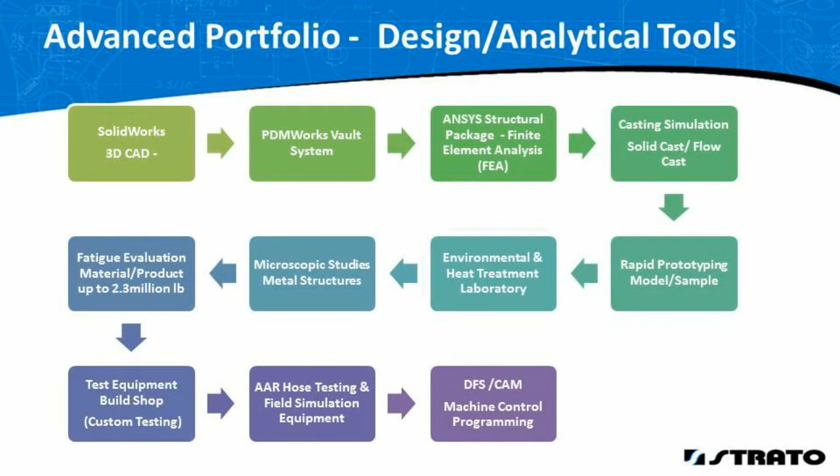Strato's depth of engineering is highlighted by what surrounds the team in terms of tools, equipment, and facility. Our 10,000 square foot research lab houses a complete product development lab, including state-of-the-art equipment to test products and materials. Strato uses an extensive portfolio of tools, processes, and laboratory testing to develop and improve parts. With these, we can optimize strength and fatigue life while minimizing cost and weight.

SolidWorks is our base platform for drawing. It has features to allow modeling, assembly layouts, animation, and to provide imports to more advanced tools. This also has one of the highest compatibilities with other CAD systems. We can and do exchange drawings with our vendor and customer software. For easy customer interaction, any file type can be created to exchange drawings or models within any other engineering software.

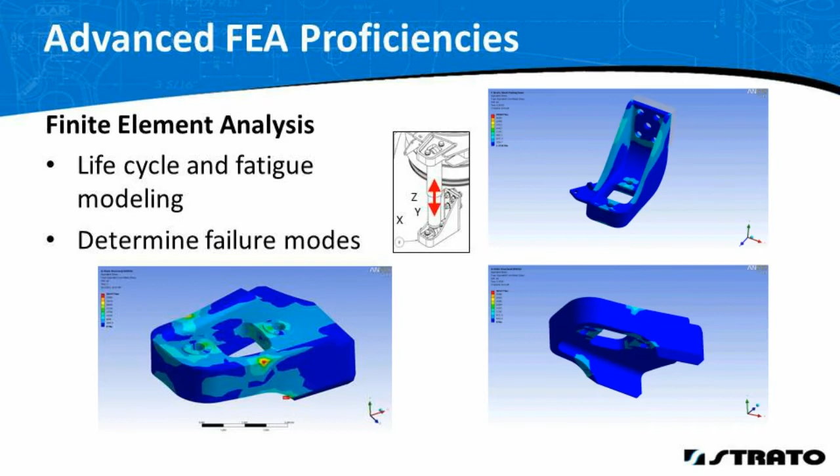One tool that uses inputs from SolidWorks is the ANSYS Structural Finite Element Analysis package. Strato Engineering has advanced capabilities to perform product strength evaluations, fatigue analyses, and determine failure modes of current design, and then optimize a new design.

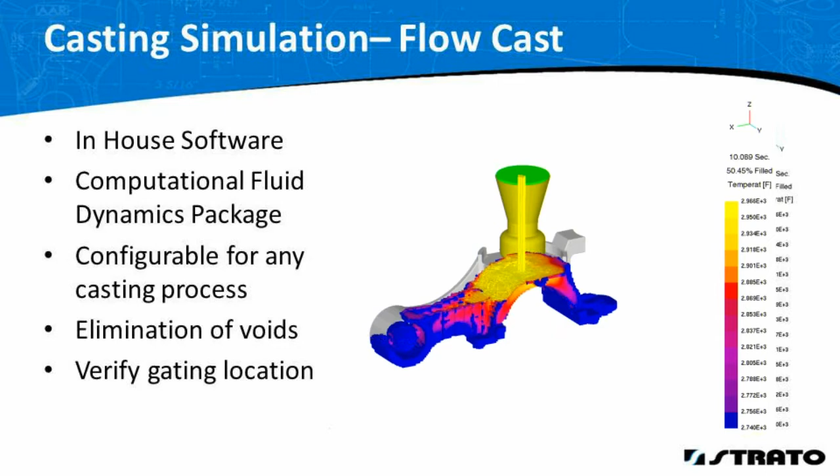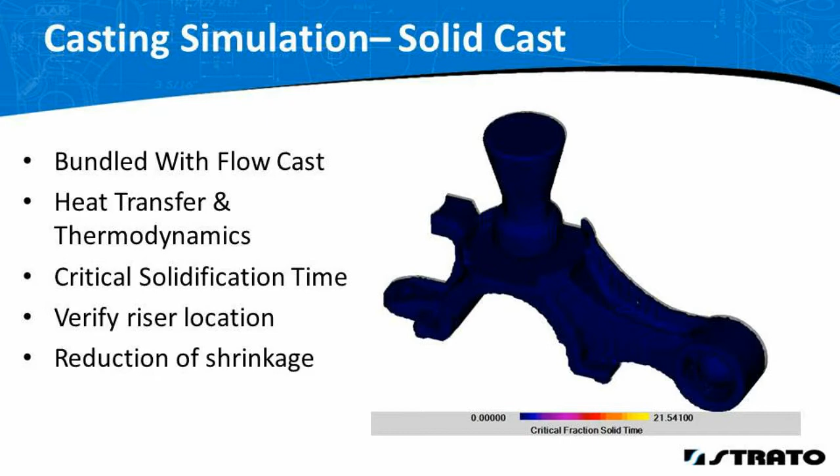Strato also designs the tooling critical to casting successfully. We use FlowCast, a computational fluid dynamics package, to optimize part orientation and gating locations to ensure the elimination of voids. We also use SolidCast, a heat transfer and thermodynamics package that works in concert with FlowCast. This package provides Strato engineers the critical fraction solid time to mathematically verify riser location and eliminate shrinkage. These products are used with our vendors' toolmakers to maximize casting integrity.

Modeling is a key resource in design. Our rapid prototyping machine can build a plastic model in under 24 hours, which can be taken into the field to be tested for form and fit. When designing parts to fit across a wide range of cars, this testing can be very valuable.

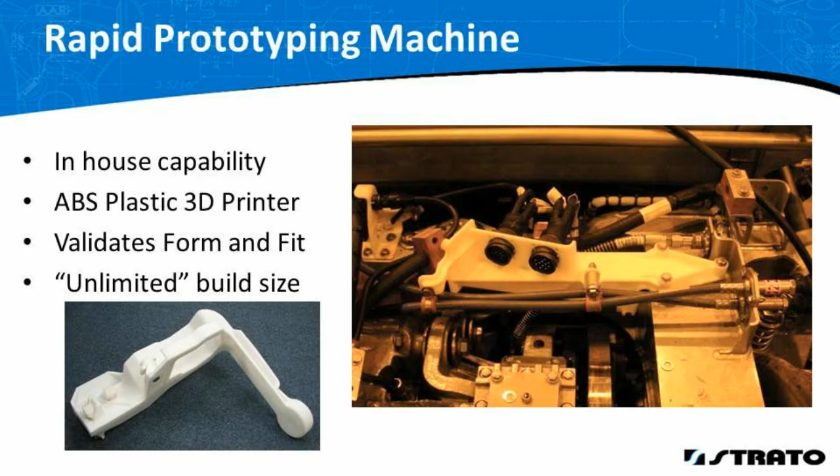On the left is a 3D model. A plastic prototype can be made in 24 hours for fit up from the 3D model. If desired, Strato Engineering can take the plastic prototype and have it cast in steel using an investment casting process. This allows us to make a steel sample for testing without the expense and time of permanent tooling. A sample can be available in less than 28 days.

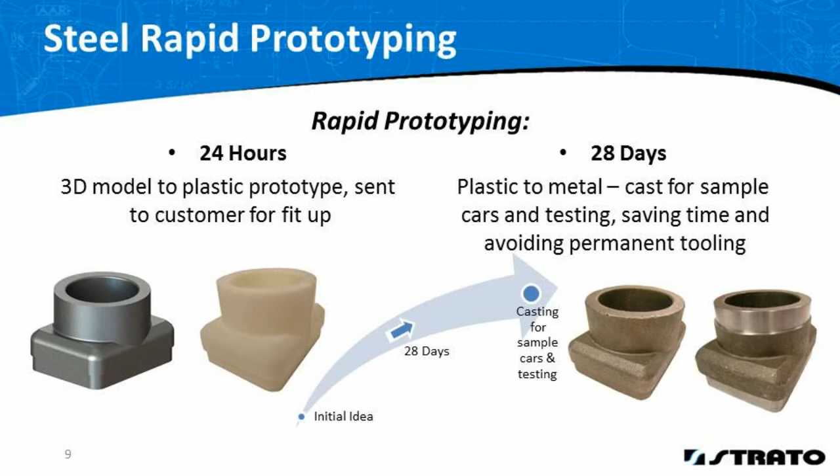Designing a product and simulating the stress loads is only the start. Metallurgy and material properties are critical for product performance. Strato has an in-house metallurgy lab and testing facilities for heat treating and quenching.

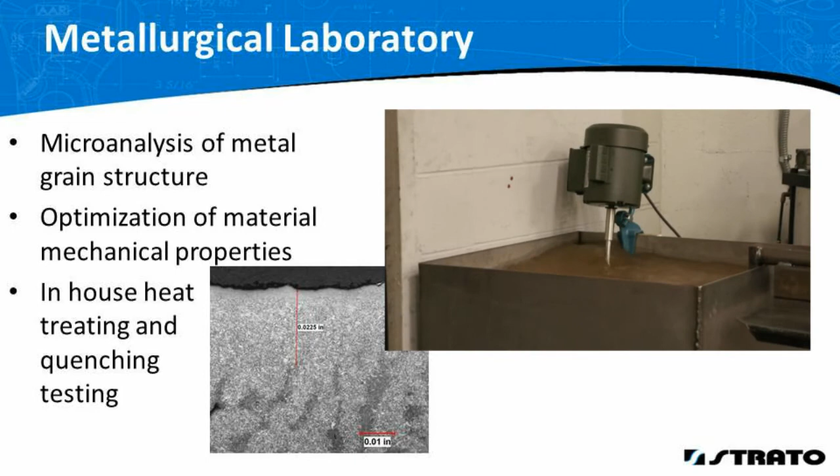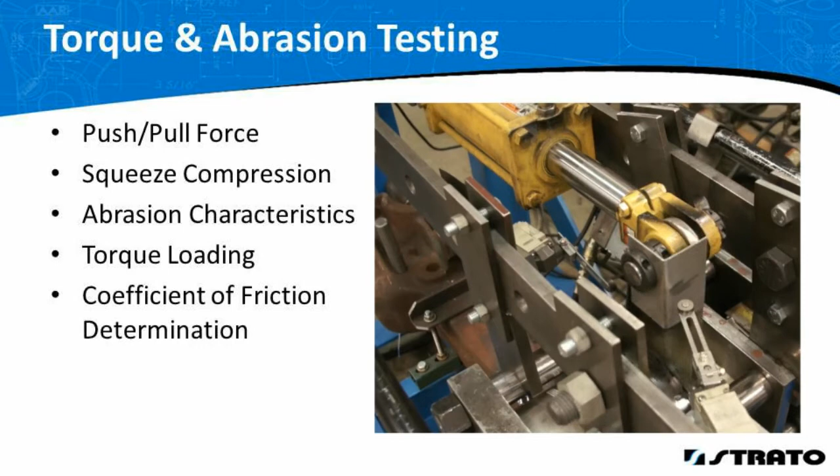The torque and abrasion tester is allowing us to test new materials that are not traditionally used in the railroad industry, but might allow us to make significant steps forward in extending product life cycles and reducing maintenance costs.

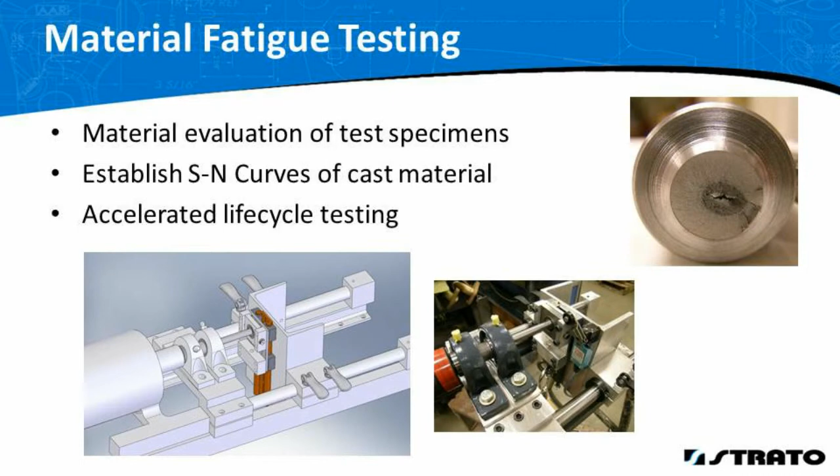An example of material testing is Strato's rotating fatigue testing equipment. With this, Strato Engineering is able to test the fatigue life of multiple test specimens before scaling up to full production on a given material.

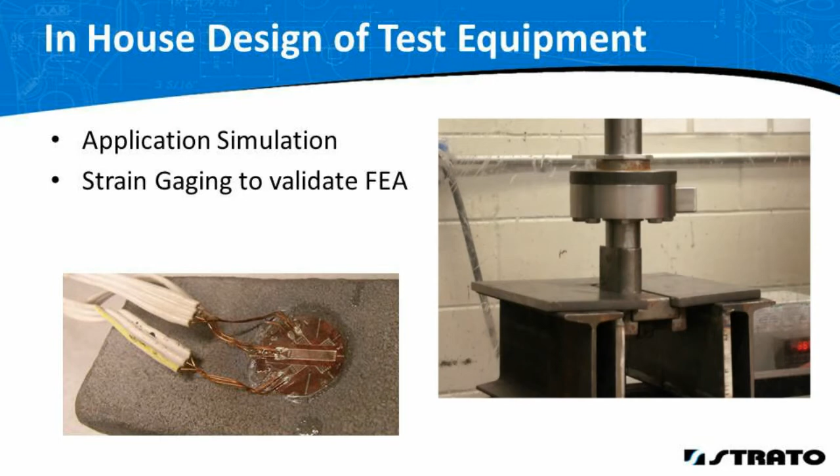Strato has also designed numerous machines to simulate field conditions. The tension and compression tester is an example of replicating real-world conditions in the lab. It can also be coupled with a strain gauge system to validate FEA analysis.

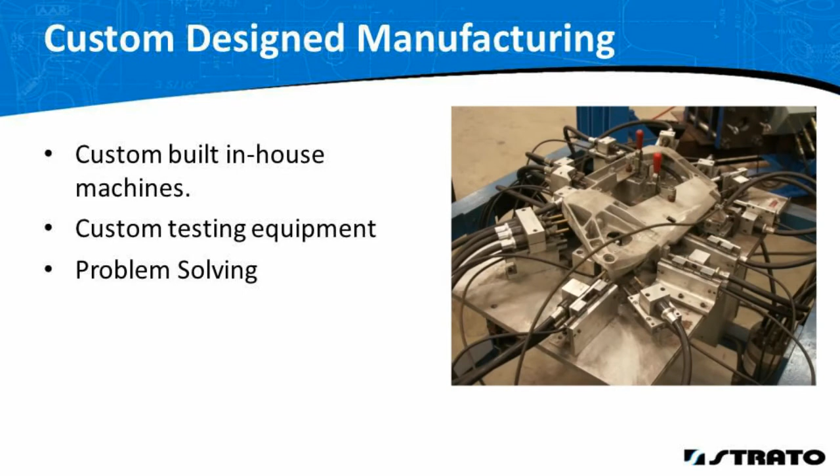Strato also builds in-house a number of machines to address unique problems. Seen here is a seat casting that required 23 holes drilled on 16 planes. This part had problems with alignment installation until Strato designed this machine to drill all 23 holes from one fixed position.

Strato embraces an engineering design discipline that incorporates the design elements of manufacturability and maintainability to provide our customers with products that can be made to a consistent quality efficiently and a product that has low incidence of failure, along with a low cost of ownership and extended life.

DFM squared is viable because of the overall depth of engineering at Strato. To optimize the many design elements requires true concurrent engineering capabilities, from design to build, to be in place. Firms who lack these internal capabilities cannot execute in a coordinated or timely manner.

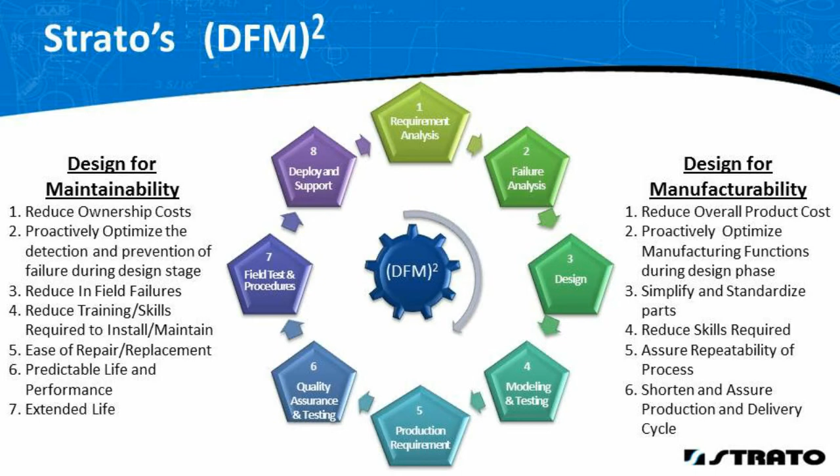While the goal is simple—optimize during the design phase manufacturing functions and detection and prevention of failure—it requires a significant set of capabilities to address and resolve each step properly.

An example of what we mean by having the capability to execute DFM squared is in tools to optimize the manufacturing function and precision machining. Design for manufacturability is accomplished by having design teams responsible for both product design, process selection, and machine programming.

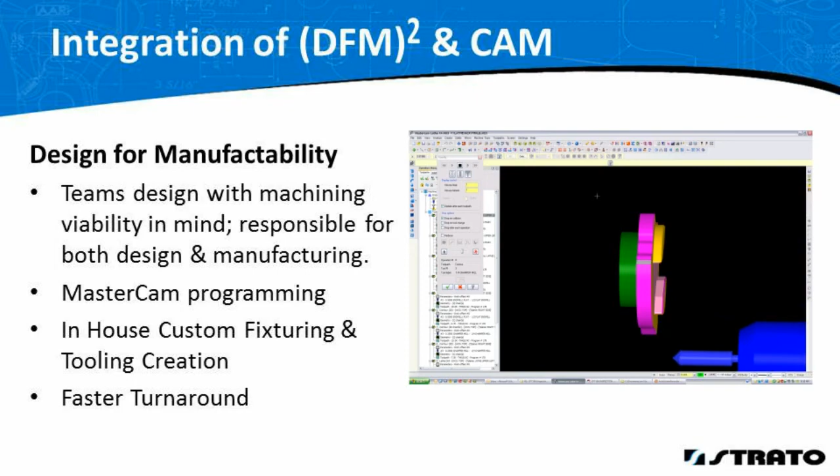Knowledge of the manufacturing process and the ability to create fixturing and tooling in-house aids in the design process. If we did not have the ability to make tooling, fixturing, or program machines, it is unlikely we would understand the issues, and even if we did, the development time would be so extended it would become dysfunctional. The bottom line is faster turnaround and a well-manufactured product.

There is good reason for Strato to be a leader in the DFM squared movement. Many components used today by the railroad industry were designed in the 1950s or earlier for operating conditions that no longer represent the scope of operations today.

The past emphasis has been on lowering cost more than on improving performance, but that time is now past. Cost of ownership is expanding to look at the cost of in-service failures and extended life. Design models have to evolve past cost focus.

The operating environment of today and future plans that include longer trains, heavier loads, and faster speeds are showing that those designs are not as robust and reliable as the industry needs. One industry leader measured component failure of trains 10,000 feet and longer and found they are 3 to 4 times more likely.

Regulation is also playing a role in stricter requirements. Designing for maintainability will lower the ownership costs of our products and our customers' assets. More importantly, it must reduce the rate of in-service failures and reduce train delays and catastrophic failures.

To design parts to meet tomorrow's needs, Strato is building a new generation of test equipment for testing critical components in any way necessary. The Hercules Ultimate Failure and Fatigue Tester will play an important role in DFM design and evaluation of our products and our customers' evaluations.

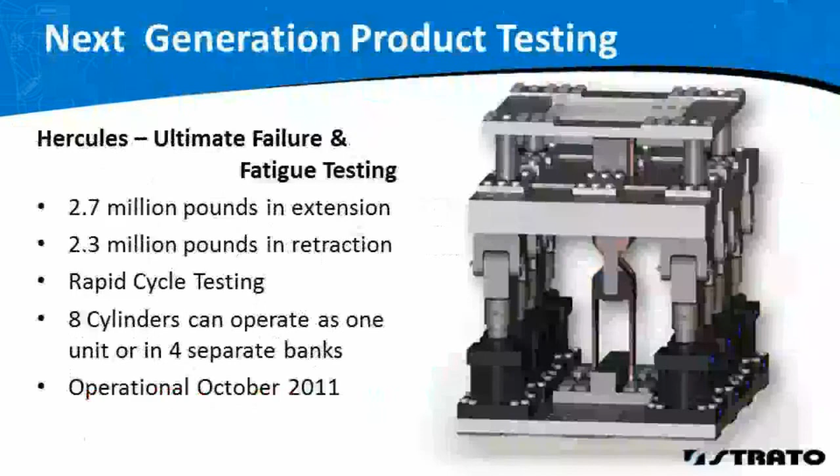Hercules will have the ability to do tension and fatigue testing far greater than available today on draft system components, truck components, rollover protection, and other safety components at levels current operating and future conditions will experience. This will help us identify design, material, or process issues that will cause unacceptable reliability or life requirements.

Strato is dedicated to making safe, effective, and extended life components for cars and locomotives. To ensure that we meet the mission of our company and exceed the need, we will continue to expand our resources and increase our capabilities to serve the industry and our customers.